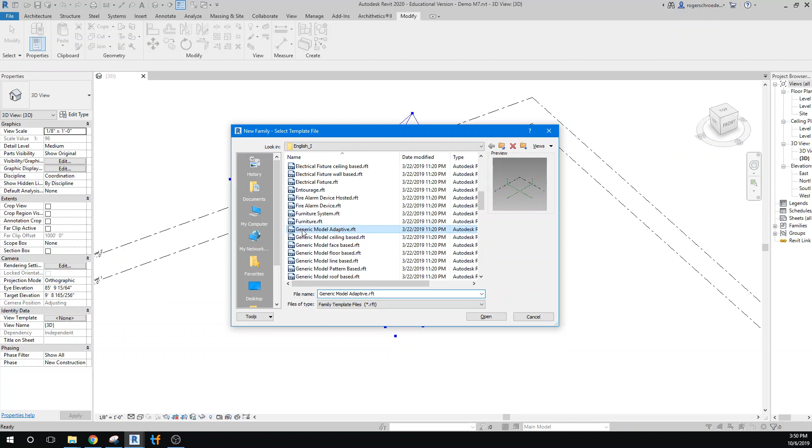And we're gonna look for the term adaptive. So we're looking for a generic model adaptive. We'll open that up.

And let's save it right away so we can have a way to identify it quickly when we go to import it. I'm going to call it rib. I've already been working on this, so we'll just replace it and we'll start with a new one.

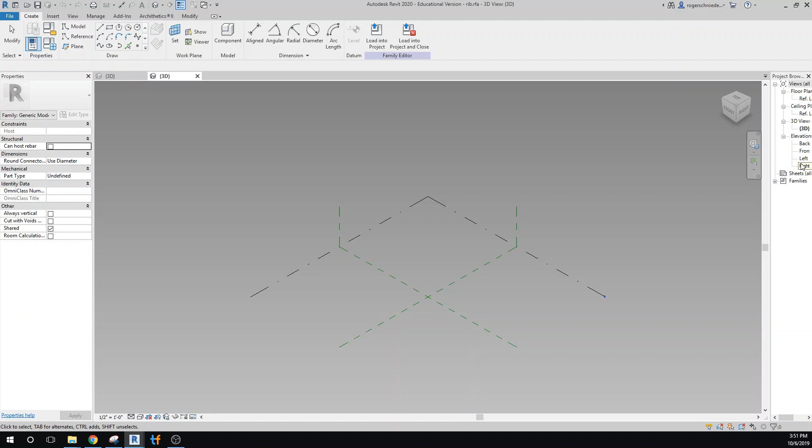And the first thing I want to do is put in some reference planes, levels, so we have a sense of scale about what we're doing.

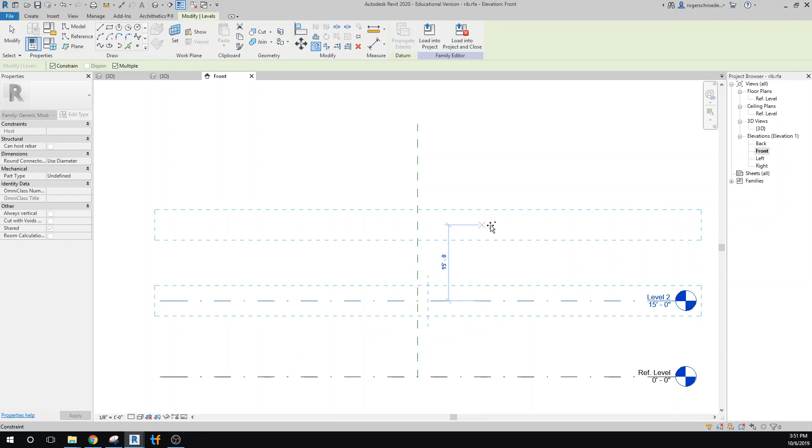So I'm going to grab the level, the reference level, and just copy it up 2 times. I'll do that multiple, so I'll go up 15 feet, and another 15 feet, so we have just a little idea of how big we're making our object.

And I'll go to 3D view now. And I'll select this plane so we can attach our adaptive points to it.

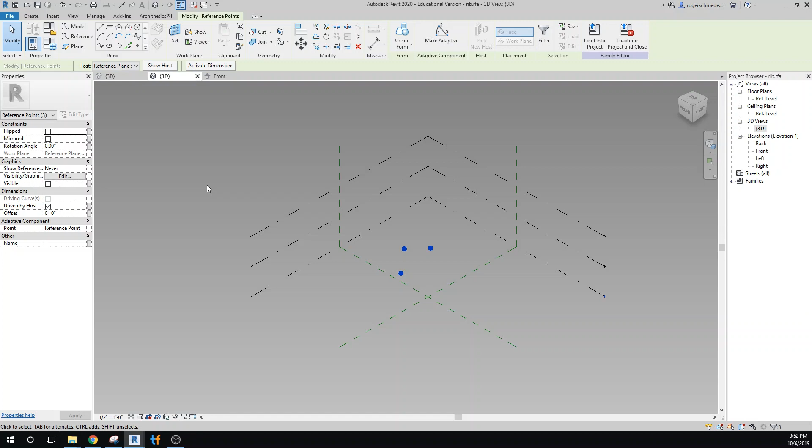And I'm not concerned where I'm putting them right now, so I just placed 3 points down. And we can label those as, well, they're already reference points, so we're all set.

And we'll go ahead and we'll make those adaptive. And we want to just check the numbering sequence. We want to start 1 at the bottom, 2, and then 3.

And let's go back to our front view now and just pull those into some sort of alignment. So this will be our reach of our arm, so we'll put that over there. And we'll bring these 2 onto the other reference plane.

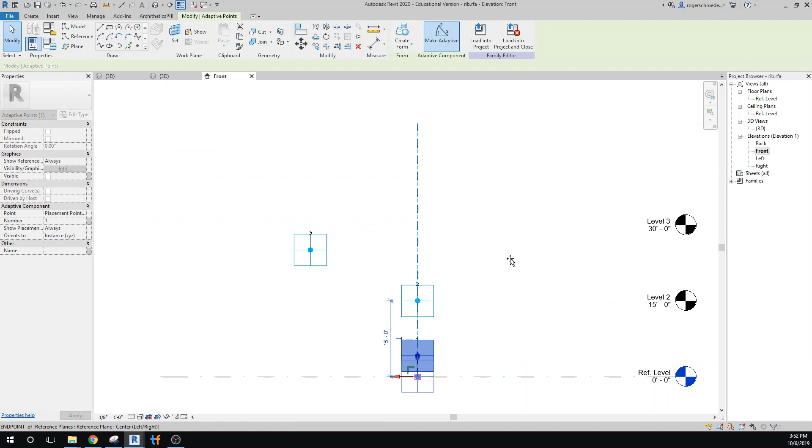Okay, so once we have that lined up, we'll go back to the 3D view and we'll do a little bit of modeling now. So the first thing I want to do is create some relationships between the components so we can do some extrusion.

So I'm going to draw some reference lines. And I'm going to make sure my 3D snapping is on. And snap from 1 to 2, and then I'll snap from 2 to 3.

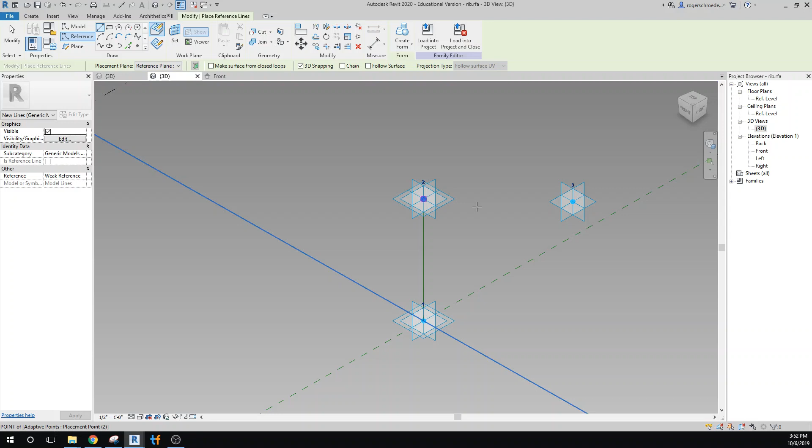And let's build a few elements. So we'll zoom in here and we'll make a flat plate. So I'm going to go set the construction plane. I'll use that outside plane right there.

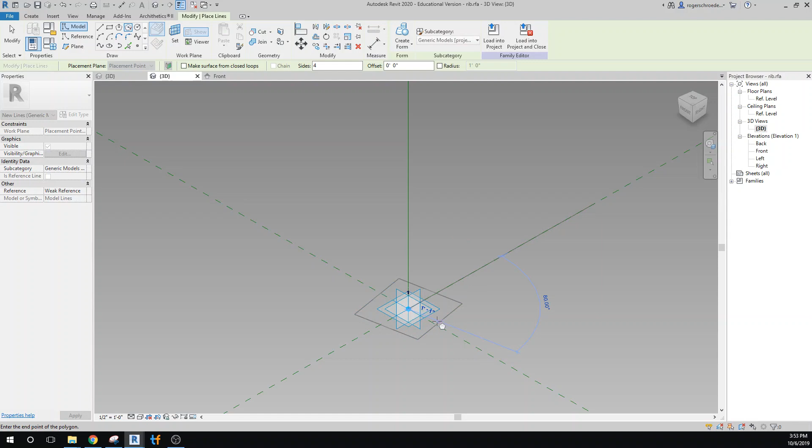And I'm going to use the polygon tool to center with a center point and make a 4-sided polygon, a rectangle. And we probably want this thing to be relatively large, so that's 2 foot on the bottom.

And we'll do some modifications to this. I'm going to pull one edge over. Click on that, and I'm going to pull that over until it lines up. And we'll make this thing 6 inches thick.

Whoops, I've got the wrong one, let me undo that. And I want to select this line to make this number 6 inches.

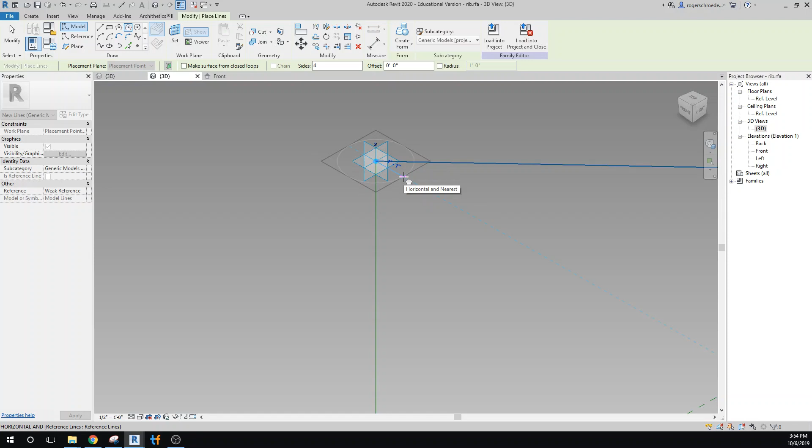And we'll do the same thing up at the top. We'll select a reference plane up here. And we'll make another rectangle. And we'll make this, well, if it's 2 feet at the top, let's go down to 8 inches here.

And we'll do some modifications. I'll grab this again, and I'll pull this in until it hits our reference plane. And we want this to be 6 inches.

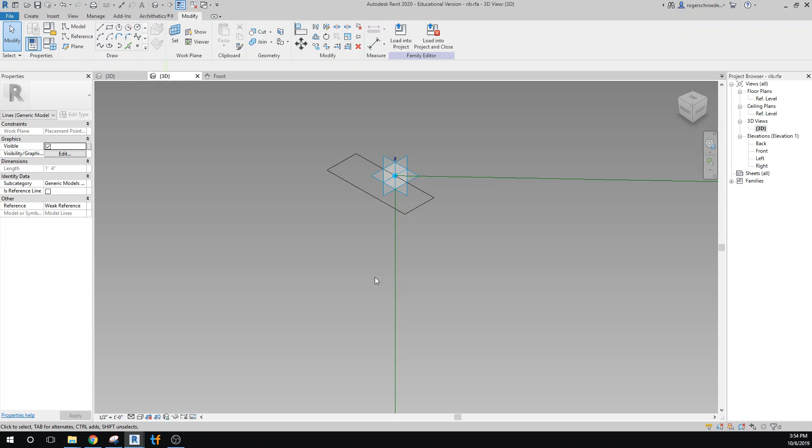Oops, almost did the same thing again. I want to highlight that one and make this 6 inches. Okay, and now we have our 2.

I'm going to grab that. I'm going to tab, roll over this and tab until I can select this one. And then I'm going to grab our tab here and then hit the control so I can select all 3 of those items. So we go ahead and create the form.

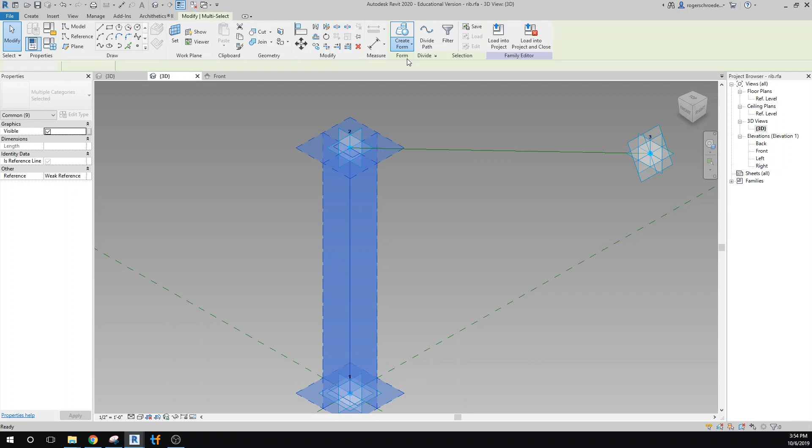So we have the start of our tower, of our rib. And I'm just checking to make sure that's going to behave adaptively.

The next thing we want to do is an extrusion out that way. Let's see how we can accomplish that. I think what I might need to do is put an adaptive point on this line so I can get a reference plane. Let me try to do that right away. I'm going to click onto this line, very close to the other one, but I need a place to extrude that out at. Let's set a reference point on that. There we go.

So I can now draw another inscribed box. We'll zoom in here. That's 6 inches also, so that'll be fine. We'll do the same thing we did with the other one. We'll pull this in, so that's 6 inches that way. And I'll change this to wireframe so we can see through.

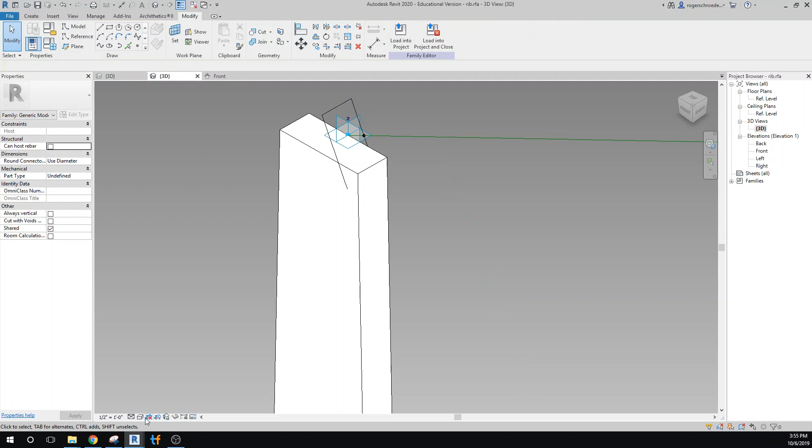Now let's go off to the end, and let's draw something a little bit smaller up here. So once again, I'll set the reference plane. And we'll zoom in here.

And we'll make that, well, let's see, that would be 4 inches. But we still want it to be 6 inches. So I'll go out to 3. I don't know what we're on the other side there, I forget. Let's grab this and pull this in. We want this to be 6 inches.

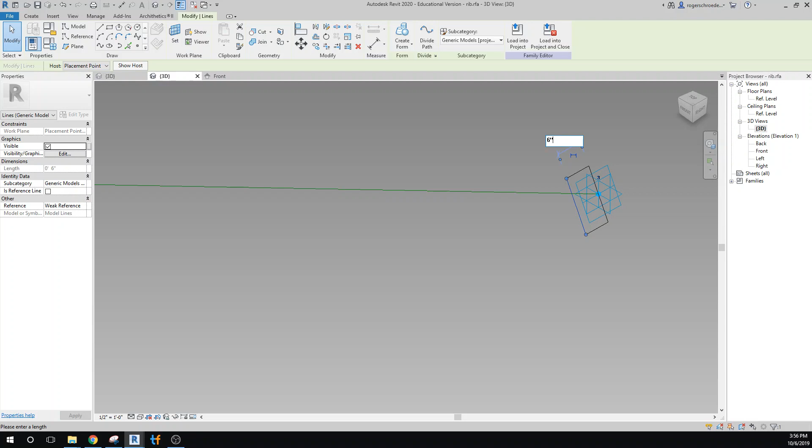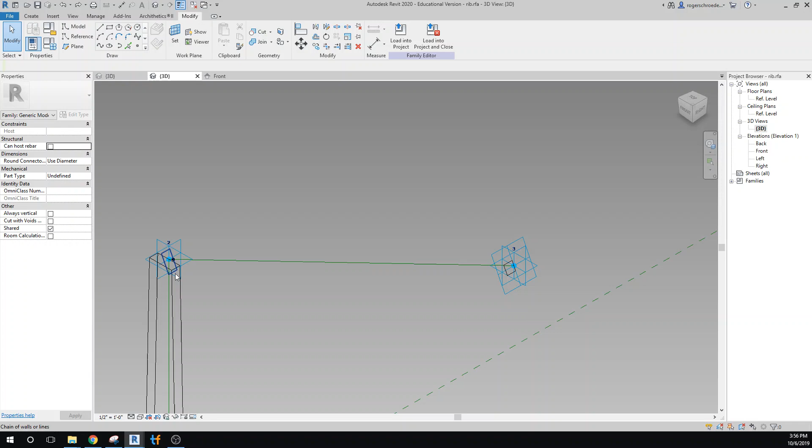Okay, so now we have, we'll want to test, I'm just going to test this quickly. I'm just going to grab this and pull it up just to make sure that we've got everything behaving adaptively. So we'll grab the rectangle, tab until I can get just a single reference line, hit Control to select it, and then Control and select that, and go ahead and create a form again.

Okay, and let's just check to make sure we have adaptive behavior here. That looks good. And we could try to do a little element right here just to kind of hide that corner. We try to build a little cylinder. Let's see if we can do that. Let me set a working plane here.

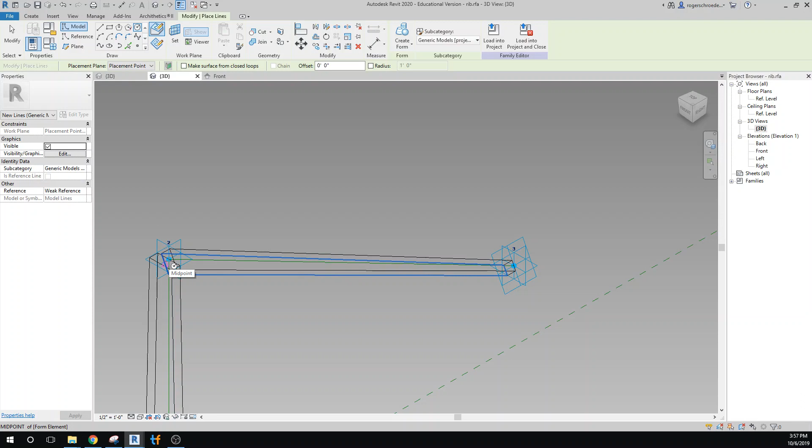And let's see if we can get on this. A lot of times that once that point gets used, it's not available again. So what I'll do is I'll try to put something really close to that area by setting another point here, and we'll then set the reference plane to that, and we'll draw a circle. Nope, it's not allowing me to select that.

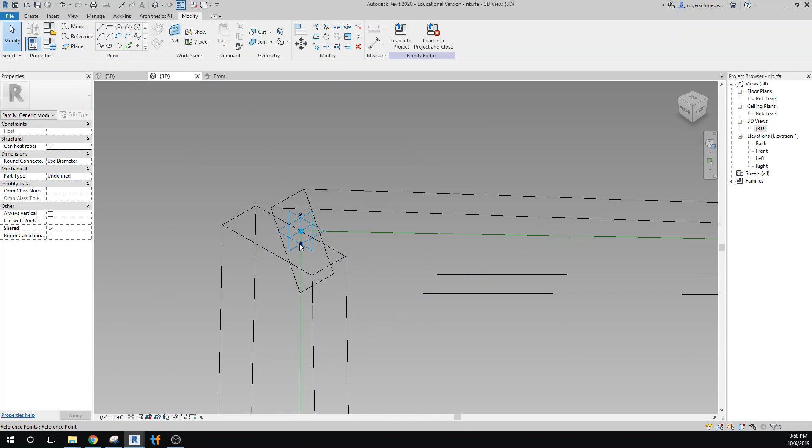I'll try this one more time, but if this is going to be finicky, we're just going to move on. I'm just going to leave that off of there for now. I'm not sure why I'm not getting it, but we can go back and correct that. I wanted to move on. I wanted to insert this into the drawing so we can move on to getting it actually placed in Dynamo. Then we can always come back and make modifications to our adaptive component later on.

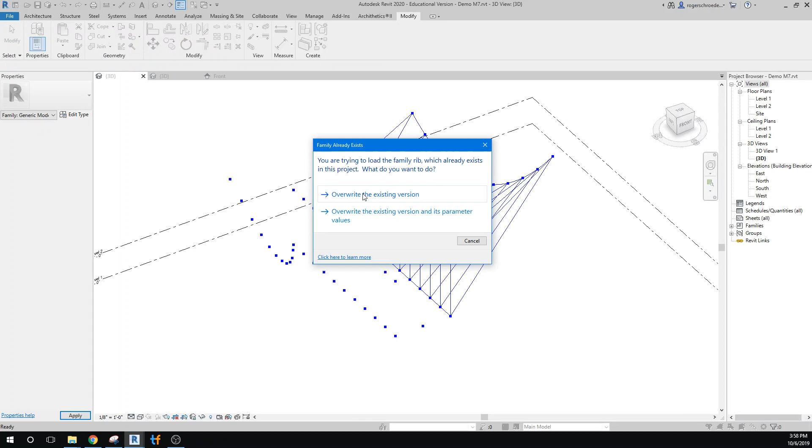So let's go ahead now and load that into the project. And I've already loaded it in that name, so I'm just going to overwrite it again. It's going to want to place it, and in this case I've already placed it, but it would come in more like for you as the rib, and you would just select the 3 points. It's just there now so Dynamo can find it as we move on to the next section.

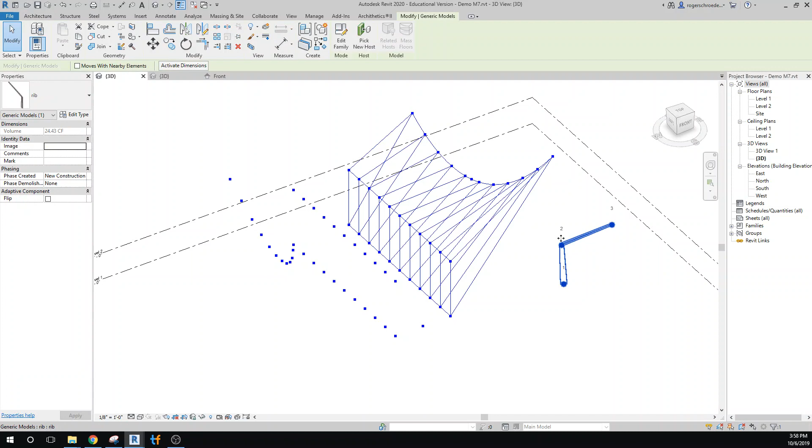So if you move any of these adaptive points, the column would actually respond with it. So that's the construction of the adaptive point. I'll end this video now, and then we'll pick up on the next one of how to get that adaptive point to connect to all of our Dynamo, our adaptive component to register with all our Dynamo reference points.